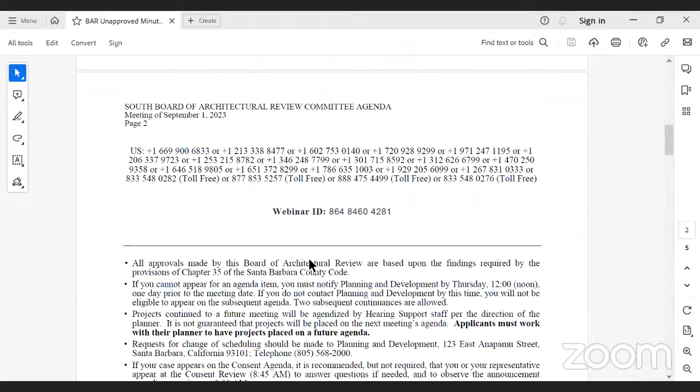Right, so item number 2 is the agenda status report. And number 5, 23 BAR 27, we have a single family dwelling to be continued to a future hearing. Okay, that's the only change. So item number 3, the minutes from the last meeting of August 11th.

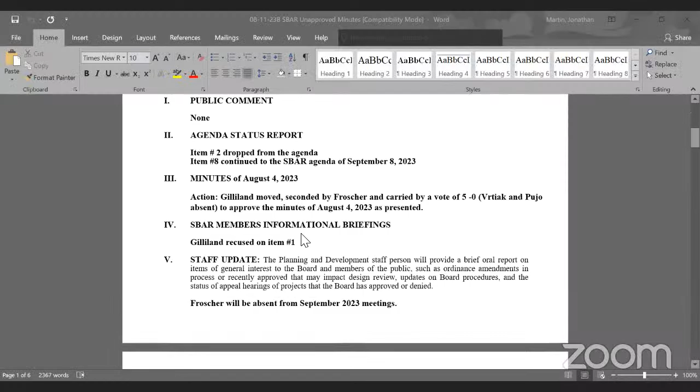Item number 1, I would just add the board has concerns at the beginning. It's just concerns.

Same, yes, yeah. That's a - absence. I think these might be the previous minutes. 8/11, right? Well, from the meeting before that. Just provide renderings or a 3D model. They did, yeah. Well, then maybe we just carry that.

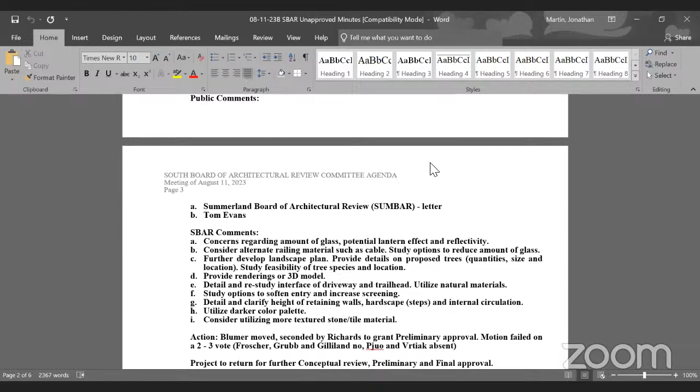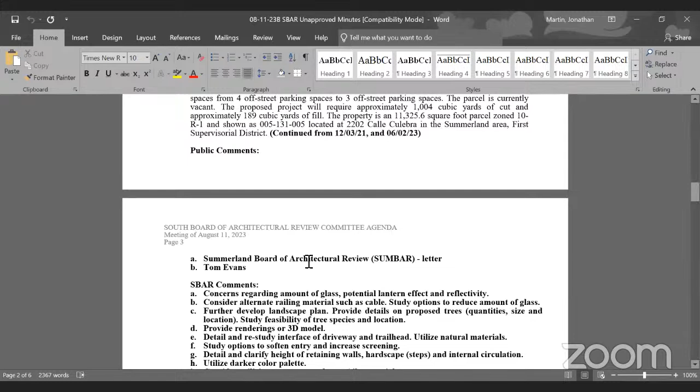Item E, detail and re-study interface of driveway and trailhead, that was discussed last time. But everything else seems to be from before.

I see Josh, you made a motion. This is the approved minutes from 6/2.

Okay, so maybe it is different. Let's go back to August 11th. There was a motion, but the motion did not pass. Motion failed, and I was there for that one. Yeah, that was the latest. So basically we said come back with a few changes, and if you have it, then you're in concept, prelim, and final.

So we did discuss the front glass, the lantern effect, and people are still questioning the railing. That was glass. So I guess this talked probably about darker color palette, talked about the tile. Okay, so I guess that's accurate. Okay, fine then, we can, if there's any, unless you want to make

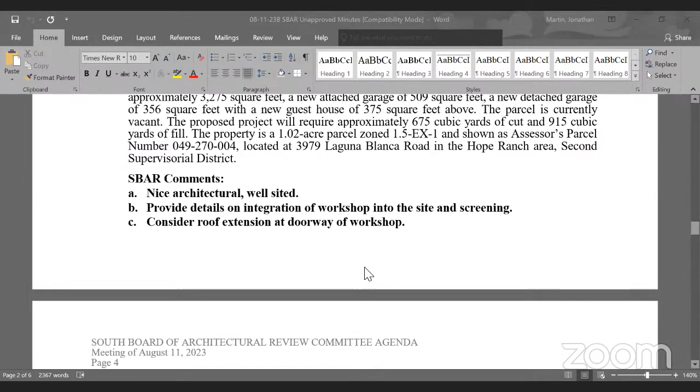Toward project, nice project. Number 3, nice architectural, well sited. Just, yeah, I think like nice architectural style. It's kind of awkward. That's easy.

It's your protection. It was not clear, but if I were to read that, I think what it was was the entry walkway to the front door got pretty close to the large oak. And so we should add to E, ensure protection of large oak at entry. Consider, do you want to comment? No, I think they had it on version 4. Okay, all right, but so we want to add to E and say ensure protection of large oak at entry.

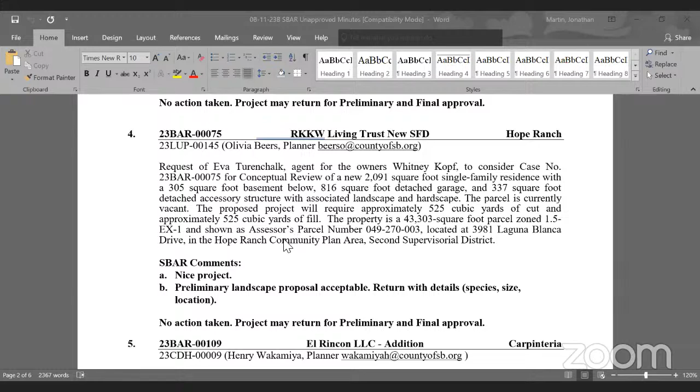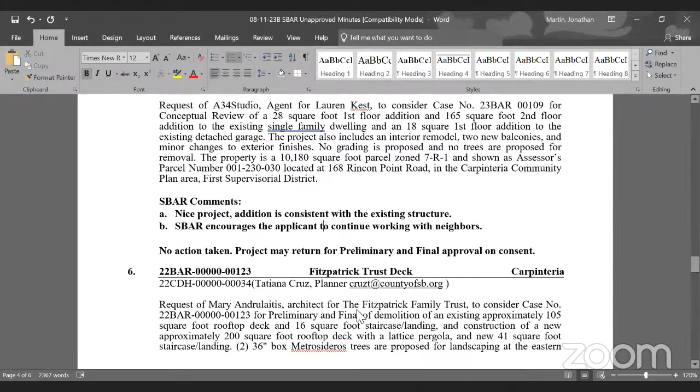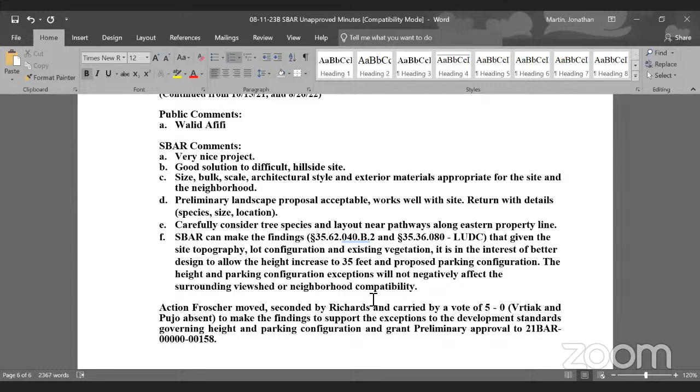There's just a T missing in the middle of that. Okay. Six. Okay. Okay. Good.

Okay, someone make a motion to amend minutes. Make a motion. Second. All those in favor? I recused because I was asked. John also. Yes, it's okay. It's okay because right here. Yeah, it's fine. Okay, so motion carries.

Moving on to item number 4, the SBAR members informational briefings. I'm going to leave that alone next. Okay.

It says Froscher will be absent from September 2023. So, yeah, so I said to Robert, okay, so we need that. So you're gone all of September. Also, yeah, I'm leaving next, so we have SBAR next Friday, right? Yes, yes, I'll be there for that. Oh, okay, and then right, I'm gonna be out up through October 3rd. Leaving that Saturday. Okay, so it's, that's okay. As long as, yeah, so,

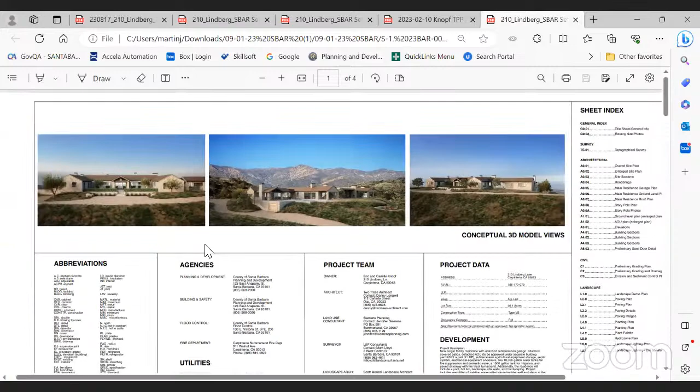The study double hung windows—we can go to, I think the elevation sheet is page... Cameron, can you go to page 17 in the PDF.

So we definitely, I think we were a little early in the development of some of that on the previous set. Oh, it looks like you guys have the previous plan set.

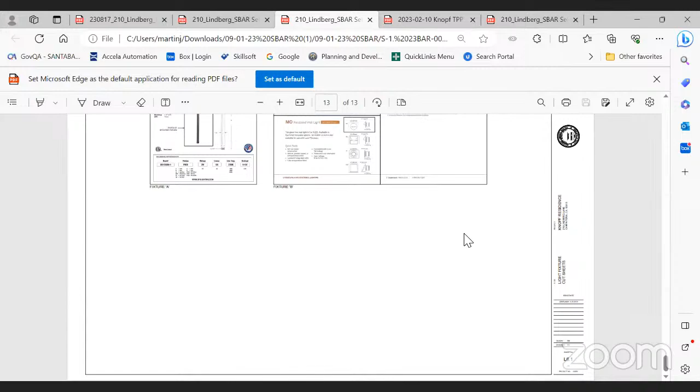Okay, sure. This is Scott Menzel, the landscape architect. The plans that we're looking at, the landscape plans, are I'm fairly certain the most recent. What's happening there, Cameron, with our plans? Yeah, I'm not sure.

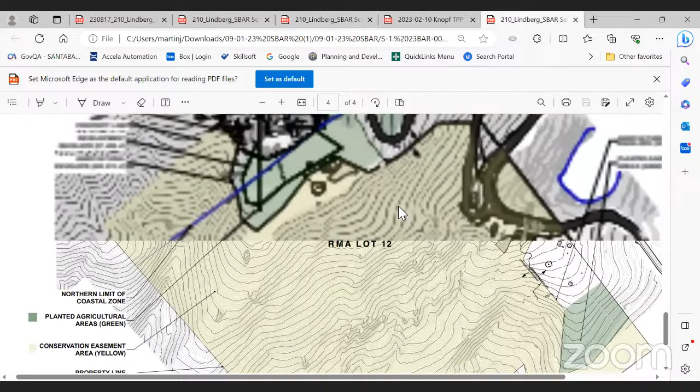Can you go back to the architectural drawings? Oh, there we go. Yeah, that looks correct. I think it's just—oh, the landscape was separated out of the set.

When I upload them for SBAR, I split the plan set into smaller file size sets, so the page numbers are off. I was saying page 17, that would have been if it was one long PDF. So it's just A3.01 to get to the elevations. A3.01. This one again.

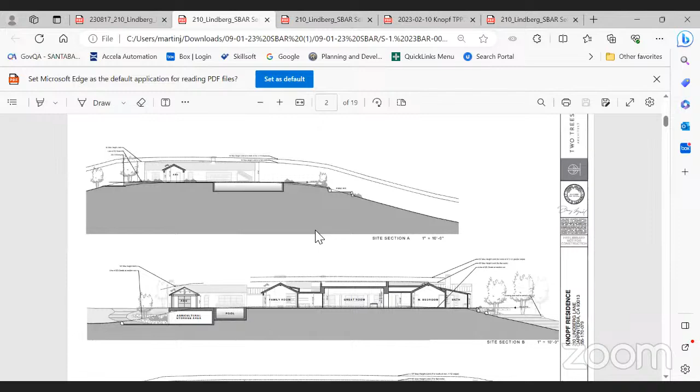So I think it's a different PDF then, is that? Yeah, they were put into three PDFs, and it does say A301. Keep scrolling, just keep going. Yeah, because in the bottom on the title block, it says printed 8/17/23. Okay, good, yeah, that's good. We're good then, there we go.

Yeah, so the north elevation was the comment specific to that. There were these narrower windows on the front and just kind of an overall lack of development at the time of the alignments of the windows. So I think as a whole, at this preliminary level, we've studied that much closer - the alignments, plate heights, proportions, operations. I think you can see that in the elevations there.

On the south elevation, consider dropping header down to match windows beyond. We did that, I think it looks much better on those patio covers, yeah, just following the basic south elevation.

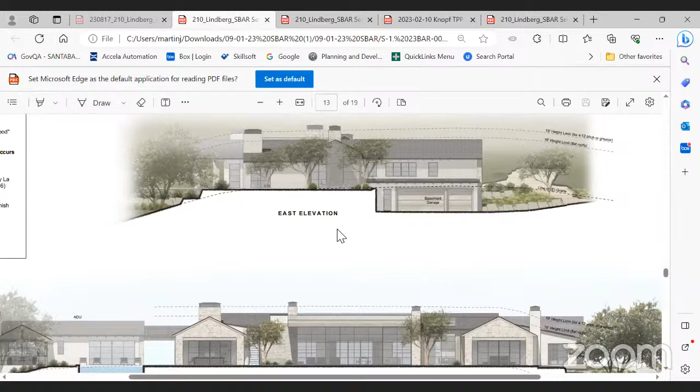Could you repeat that one about the header? Yeah, so previously there was this opening, see the wood header on those covered patios, it was higher and didn't align with the windows, so we pulled those down to align, and I think it looks much better. Has the right amount of stone on the shoulders there, which looks better. Also provides better protection from sun.

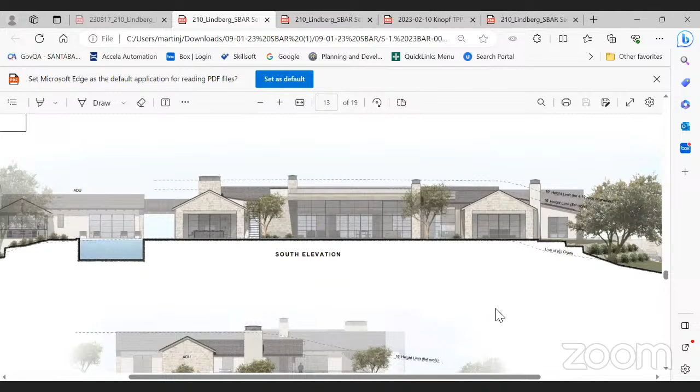Okay, so study materiality of garage elevation. I believe that's - you scroll down, it's on the same sheet. It's actually that's the storage, it's on this sheet. Scroll, I think it's up. Yeah, just scroll up a little bit. There it is. Yeah, so I think we had more stone down there. We just spent some more time looking at the composition of that garage elevation there, which is cut in, and it's not very visible, but I think we made it look a lot better.

The color should be earth tone, not a white. The elevations in 3D have been updated to show the earth tone plaster. The plaster color has an LRV of 60. It's kind of a beige, off-white, and you can see that also on the materials board PDF that should be included.

I'm sorry, did you want to go to the materials board? Yeah, thank you, and I think that's it there. So these are kind of the colors. We want to have some contrast, but also really the goal is to sort of blend in with the natural colors of the stone hillsides in the background, the color of the soil, and just kind of be on the same tone as the natural landscape around it.

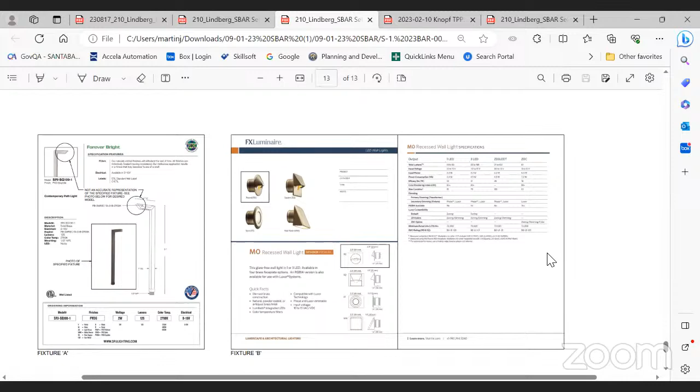If you care to see, there is a lighting plan in this set, with two types of fixtures. If you jump to page 10 of this PDF, I have a path light and step lights. Really all we're doing is illuminating paths of travel from parking areas to the front door. The path lights are 2 watts, step lights are 4 watts.

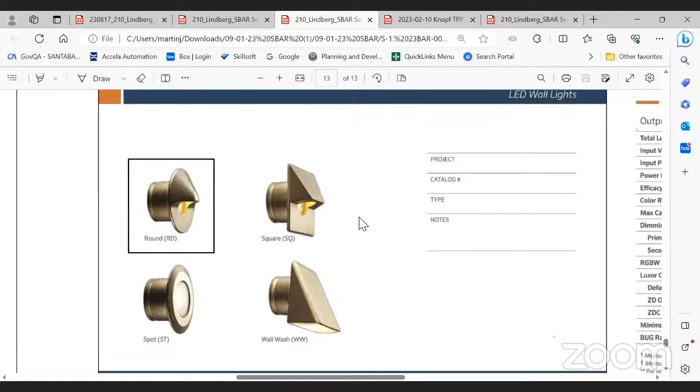Everything's pretty subtle, and that concludes the landscaping. I'm happy to answer any questions. Right, thank you. Anything else from your team?

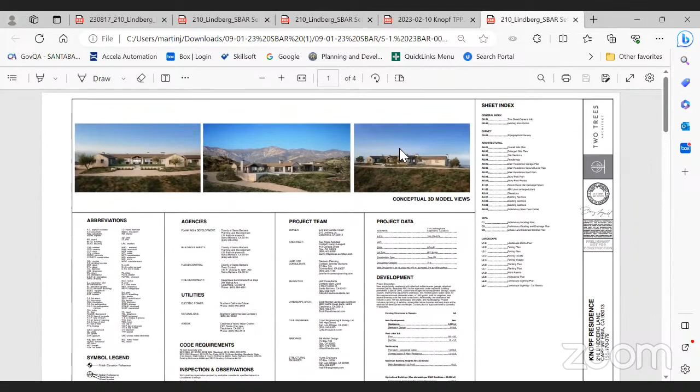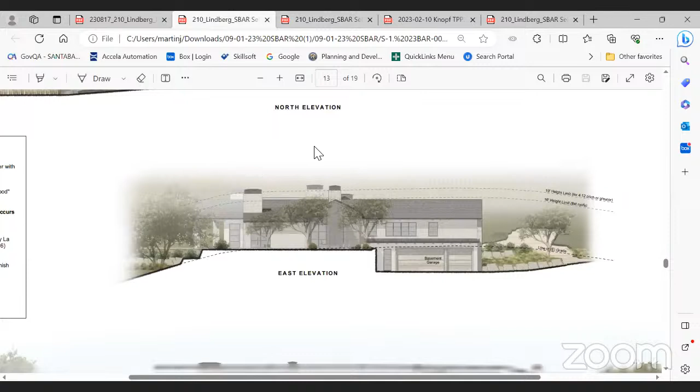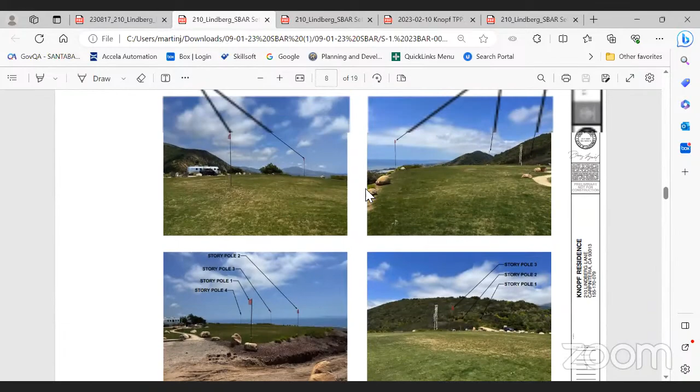Yeah, I was hoping just to have a chance to look at the renderings on the architectural set. I think they're on page... sorry, I don't know which sheet they're on. I'm not sure what PDF they're on there, but they were page 7, so probably the second chunk of sheets. Yeah, probably one PDF over is my guess. A 0.4, it's 0.4. Towards the beginning of the set. Maybe the first - yeah, just keep going, I think you're almost there. Keep going. There you go, yep.

I just think, the members that came and saw the story poles - these gables you see, these 4 gables on the top image starting at the left, right next to it on the covered pool patio, the game room patio, and then the master. Those are the story pole peaks, and those were the fronts of the patio ridges there.

I just want to point out that I think the master bedroom is probably the most towards the edge of the bluff of all the structures. Everything else is very well tucked back. A larger glass, tall ceiling and more glass wall is that big flat roof opening, and that's tucked well back from the edge of the bluff. And by lowering that opening on those covered patios, the glass portion, we've lowered those doors to 8 feet, and they're pushed quite a bit back and well covered.

And I think that, along with the strategic oak tree planting along the southeast corner of that master, does a great job of nestling that in a natural looking way. So I just wanted to point that out.

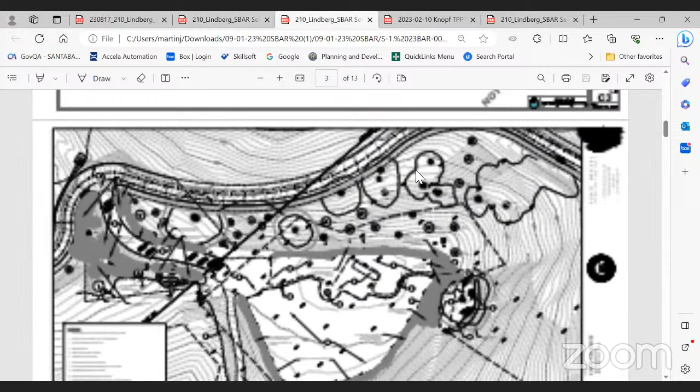That brings me to one of my comments - I think there was an allée proposed for some of the driveways to do the landscape. Scott, have you show us where, if - yes, if you go to page 7 of the PDF of the landscape set, which I think you're on already. It's not this set, next one. Not that one, I don't think that's civil, right? Yeah, but I think they have my plans right after civil. There you go.

There's an allée of olives proposed on this portion of the driveway. From the south, the driveway sits low, so this alley really won't be visible from anywhere, aside from up and behind where new homes are.

Potentially visible from the north, yeah. Everything else is really naturalistic in the landscape, but personally, I'm not sure. Maybe a quick straw vote - obviously the architects weigh in too. Does anyone have any issue with the allée on the site like this?

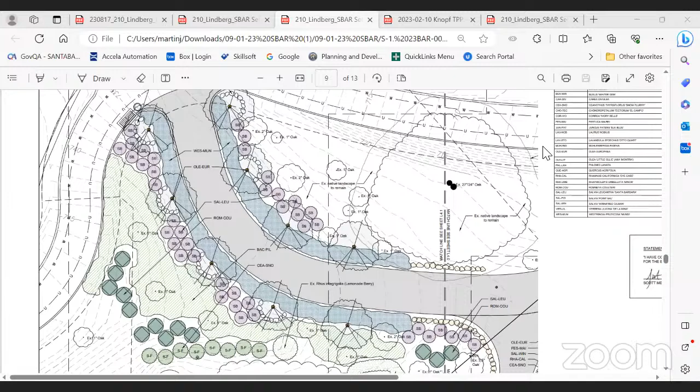The other thing I'll point out is there are a lot of young oaks to the north and south of the alley that we intend to keep, so it's not very long - about 9 plants, 9 trees. My vote would be against it, but if nobody else agrees...

Why is that the problem? Just because from a distance you see that sort of formal planting, and everything else is sort of naturalistic - it stands out, it's got formality. To me, it's at a hook curve, so there's a straight shot in. I think it would be kind of an interruption to the flow of the site.

But I think it follows the topography, and driving up there, there's several references to this - it seems to be kind of a theme, with entries along a good portion of the way up. How big do those trees get?

Maybe 20-25 feet. Not sure if they're fruitless or not. My thought, personally visualizing it, is that the curving nature of it is kind of nice - it will help from a distance break up the monotony that would otherwise be there from a straight shot in, though it's pretty short.

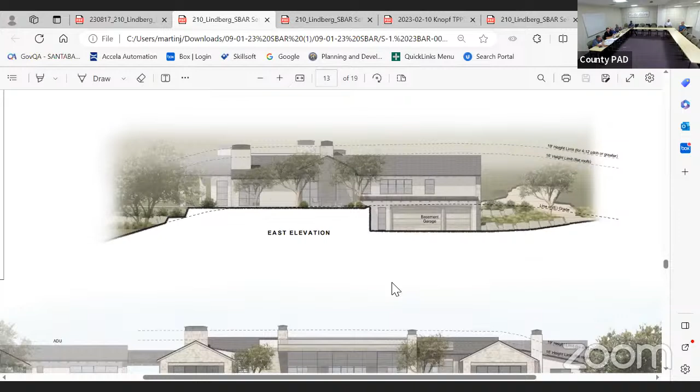The only other thing I wanted to make sure of is that the water tank in the northeast corner, which we didn't talk about, gets screened if necessary. I know there were some oak trees in that area, but I want you to take a closer look and see if it'll be necessary to add additional oaks or other plants to screen it from the north and the east, because those are going to be significant water tanks.

Otherwise, I agree with everyone else here that it's an excellent project, phenomenal site, and you're well on your way. So that would return to the full board.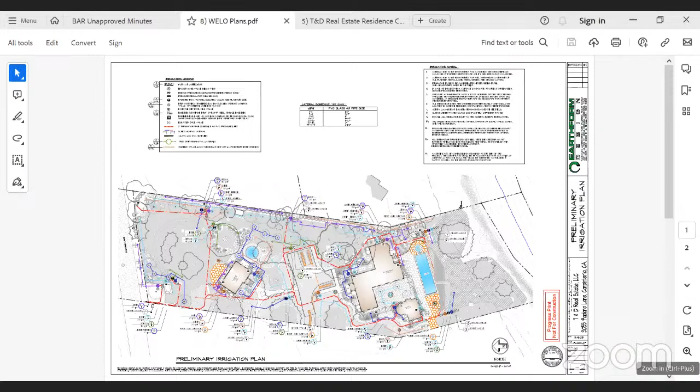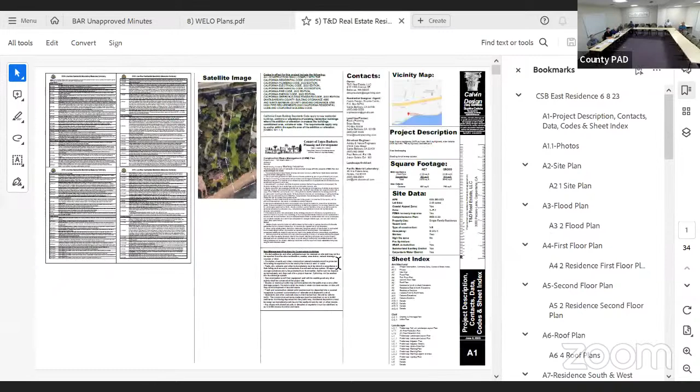So I thought what we would do, if we could, is just reorient the board since it's been so long, and address one of the comments, which was to show development on the adjacent properties. If we can go to page 18. Are these split up? They might be split up. I think so. There you go. Yeah, if we can go to page 18 of the PDF, I think that'll answer that comment.

And you can see the relationship to the project that your board's reviewed several times immediately to the west. As I think you recall, this is a one owner, two legal lot project. So if we keep going down to the civil plan on page 18 of the PDF, that's C 2.1. Keep going, John. Oh, right, one back.

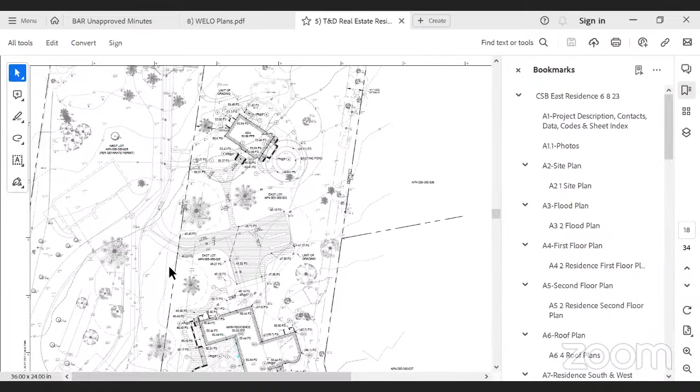There you go. So here, if you look at page left, you may remember that large addition remodel project, and then there was the detached garage to the north along that looped driveway. So upper left, that's the detached garage where we had the ADU above. Kind of where the cursor is down below, that's the existing attached garage where we demoed the guest house above and connected that second story to the residence.

So one of your previous comments was to show the relationship between the two properties and the adjacent. You can kind of see the footprint there from the survey on page right of the neighboring residence. And so a couple of the comments were related to that, the connection to the property. So we're showing that here.

And as a reminder, the previous project that you reviewed, we had the ADU kind of competing with the house. It was in front of the house, so there was some confusion, and rightly so, in terms of how do you enter, do you go through the ADU, how does this all work? So we've actually relocated the ADU to the north, and you'll see that when we get to the site plan. What you're seeing there is the connection to the driveway, the existing driveway to the west. We're going to share that existing driveway, and then we're going to pull into our motor court, which also serves as our required hammerhead, and the fire department's blessed our access plan.

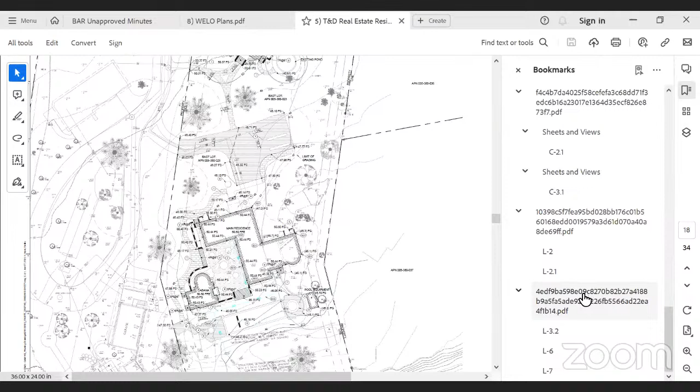So we'll let Sam take over to walk you through. Again, most of what we've done these past years is work with the arborist and our consultant on the sea level rise bluff retreat stuff, so that'll update you on where we are with the site plan. And then we'll go back to architecture, because your comments were mostly concerned about the arrangement, the forms, and the details. Essentially we've copied what we received final approval on for the project to the west, so these are kind of like twin houses. With that, we'll go ahead and hand it over to Sam, and he'll take you through the trees and the arborist report and the site planning sequences.

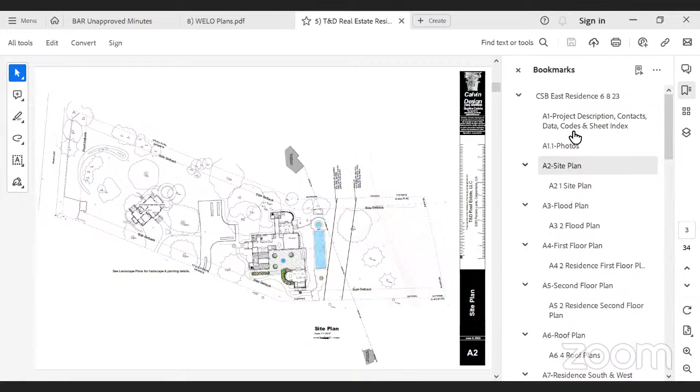Yeah, thank you, Brian. If you could go back to the beginning and maybe PDF 2, it shows some of the photographs of this property. And the reason that we took a step way back and really started to study the relationships to these existing cypress and magnificent oaks is the site is really a park, and you get that impression when you're looking at the top right, looking at the existing house to the west. There's a large expanse of lawn connecting this center part of the property.

I guess the middle left center is really a good picture to maybe blow up to give you the essence of this park-like setting. And what we did is we took a hard look at the critical root zones and all the aspects of preservation of these large trees, because that's the magic of what this owner bought. And we got Duke McPherson, and he's been working with us on the west lot. This lot is a continuity of making sure these trees are really preserved and respected in all the correct ways.

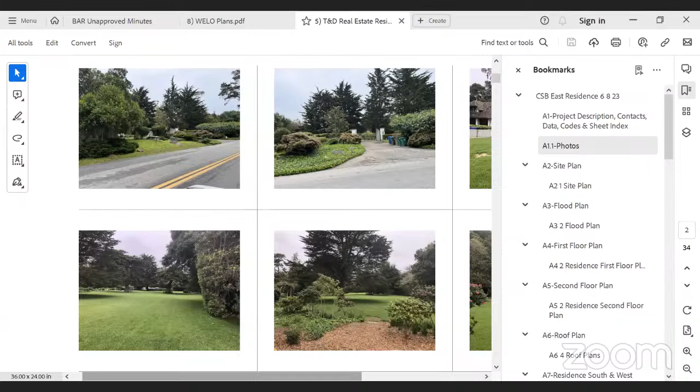So if you go from that picture to PDF 21, you're seeing all the types of trees and brush. The bottom right is looking east towards the neighbor, though you really can't see the neighbor. That bottom right shot also shows the silhouettes of the cypress trees towards the waterfront and ocean view, which is what the main house focuses on.

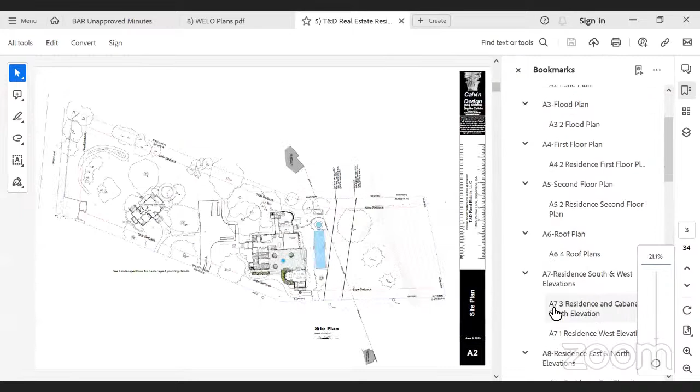From there we took it to Duke and all the CRZs. Show PDF 21L if we could. Sam, one of the other comments you reminded me of was to take photos from the beach and the adjacent properties. The reality is you can't, with that thick screening on the east that Sam was showing you. I can't get a picture from the adjacent property. And the bluff is 39 feet, so from the beach, with the setback, you can't see the house. You actually can't see the neighboring house either. Sorry, I just wanted to make sure we handled those comments at the same time.

That's great, thanks Brian. So if you go back a couple sheets, we want to go to LT1, which is the tree preservation plan. Let's go back maybe one more to give us the aspect of the site and its relationship to the west lot, because the west lot is where the driveway comes in, and then we turn left into that motor court. You can just see the constraints and how difficult this property is to develop any kind of structure because of all the large circles and the tree protection fencing.

We're going to be using permeable pavers in that fire turnaround because it just touches the edges. All that orange is showing where we've got areas of encroachment. So what we did was shoehorn in the project in the ocean area. We've got a bluff setback, which is also a constraint - you can see the line that the pool is on to the south is the bluff setback. Maybe another drawing will show that, but the tree preservation really drove all of our good site decisions.

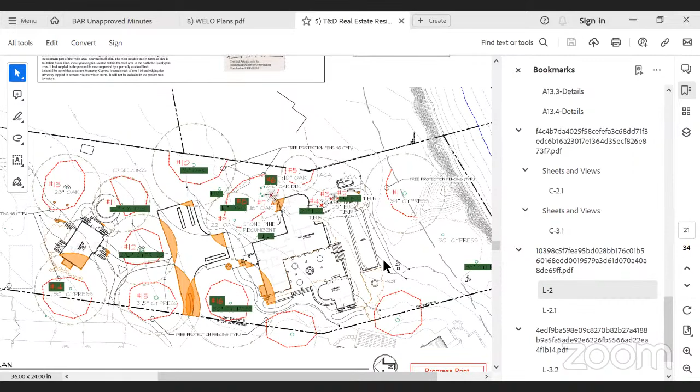So if we go back one sheet from here, that's PDF 21, sheet LO.1 - just one back. There you go.

If you blow up this at all, you can see the landscape plan consists of embellishing the green areas and staying away from a lot of the root zones, trunks and crowns of these big cypress. In order for us to really do the right drought tolerant, water-respecting Montecito Water's one acre foot ruling, we had to reduce a lot of the turf that's on the project. It does have a well, but we designed our irrigation system to work within the one acre foot constraints in case. So you see the green areas are where we're landscaping, and that is around the ADU.

There's an existing beautiful koi pond fountain to the left where the ADU is - that's being preserved. The ADU actually has a nice centered relationship for its outdoor space to the living space, centering on that low 12 to 18 inch high koi pond. All around that is surrounded by cypress trees and large oak trees. So that configuration shows the landscaping in its proximity to the ADU - just subtle small trees, really not competing with the large specimens.

On the main house, you can see we've got an entrance off of the main parking area and hammerhead, with a small fountain there to celebrate an entry focal point. Then we walk into the building that works its way around the trees and opens to the ocean with a beautiful courtyard. That courtyard form embraces the cabana on the west and the main building windows towards the east. Then all of our spaces open to the ocean, dropping down.

I want to kind of wrap up here. I think maybe you guys have gotten the gist. I don't want to take away from any of the architectural side, but we've got a very complete set, knowing that we're going to be going through Coastal Commission. So we've got our hydro zones and our WELO, and we've got some lighting that we can touch on, but it's very simple, and the site plan is very, very subtle, because we're really featuring these large trees.

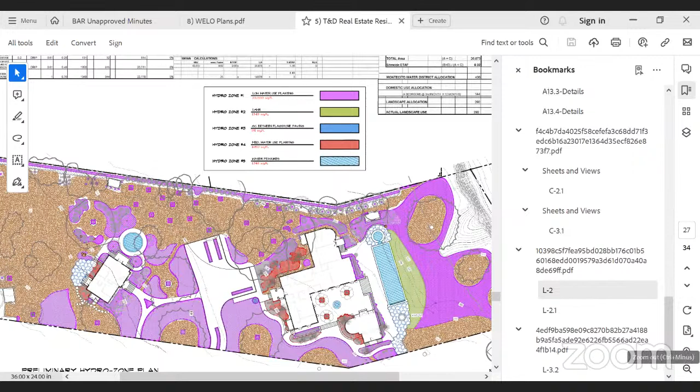Thanks, Sam. I think we can go, Mr. Chair, to Sophie. Since Sam's taking you through the whole site layout, I think we can skip over the site plan and go to sheet 8 of the PDF, which are the elevations. Sophie can walk you through how we addressed those previous comments and tied everything together.

Okay, page 8, great. Sounds good.

Okay, so we're looking at the east lot residential. This is the face looking out at the ocean. We have really complemented the west lot and the east lot. The architectural style is very similar, the Spanish colonial style.

So the two parcels have a great complemented architectural style on both the houses. And the wrought iron is exactly what the west lot has as well. The light fixtures are the same. The chimneys are very complementary, the same style as well.

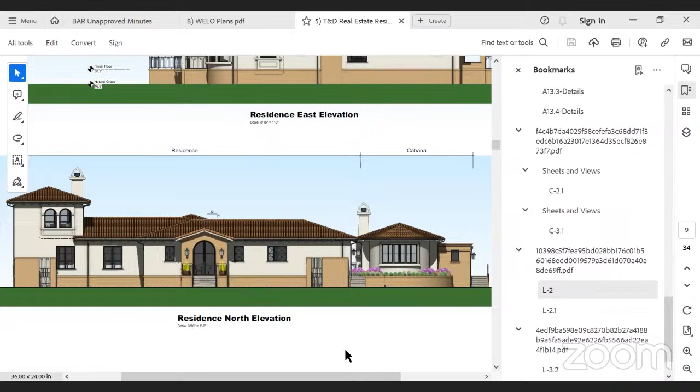Yeah, if you don't mind going to that one. So there's the front entry door, right there above the word residence. And you see there is a 2-story element to this house off to the left side of the page. That's the only 2 windows that have an arched top. Everything else is square top.

And then we have a set of sections. Oh, and just so you know, one of the pages that we do have was run by flood control, and both the ADU and the primary residence had to be elevated by 3 feet. Karen Sullivan had provided us agreement with the heights of the elevations.

So that, I think, gives you the gist. Of course, we've got a lot more details than you would typically see at further conceptual, but we had those from the West residence, so we packaged everything together just to have a complete set. This was our CDP submittal set.

And I should just, in summary, say that we do have a planner assigned. We're going through, she's done her initial review and feedback, nothing that would affect architecture or landscape. It's stuff like issues to do with the sea level study and bio aspects and that sort of thing. So we're not anticipating from a planning perspective that anything is going to change site plan wise, building footprint wise, height wise, as we weave our way through the CDP process.

So I think that concludes the presentation. Of course, we're here for questions. Okay, thanks. Questions from the board?

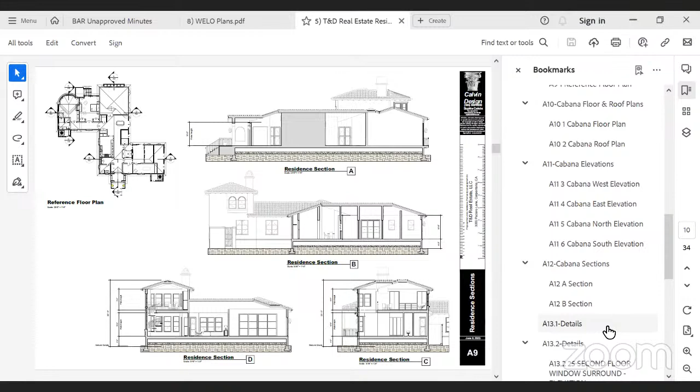I don't think we have 12-inch walls, we have the 6-inch walls. Yeah, I thought the details show that, don't they? We'll take care of that, happily take care of that. Do we have other details? Okay, so it's not... No, I think it's statement.

Maybe. Okay, all right. How about the materials? Do you have a material board or?

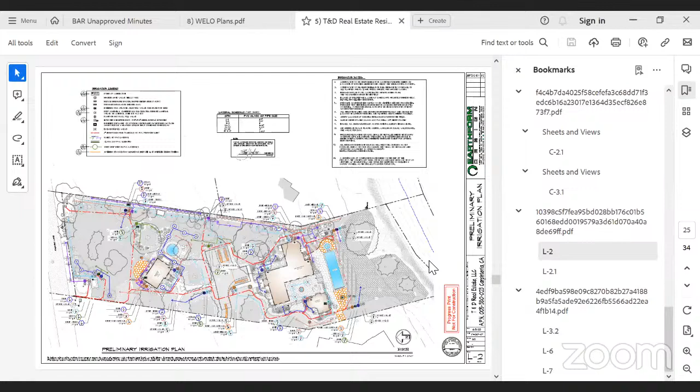We don't have a specific material board, but the colors are on the elevations. We're matching everything on the property to the west, so we'll make sure to provide those - same plaster, trim, stonework, etc. These were the agreed upon final colors and materials used for the project next door to the west.

So just a question - usually you have a two-piece mission tile with boosters and double layer starter courses, and hot iron, real steel iron, not tubular steel. I'm just asking, is that what you're doing or not?

Are you talking about the wrought iron? Yeah, materials - please describe the decorative materials. There are wrought iron railings on the stairs, as well as in front of the cabana, where you see there's a little deck area.

But the roofing will be two-piece tiles, right? Yeah, absolutely, two-piece tile, rail tiles. I think Alex just wants a general description of the materials, like what's the stucco, what's the wood. Well, I can do that with a color board. Yeah, absolutely.

And on the towers, on the round forms, I'm not sure if it's stone or plaster forms to create some interest and projections - you're doing that with plaster, is that correct? Correct. Okay, we'll look forward to seeing the details of that when we come back.

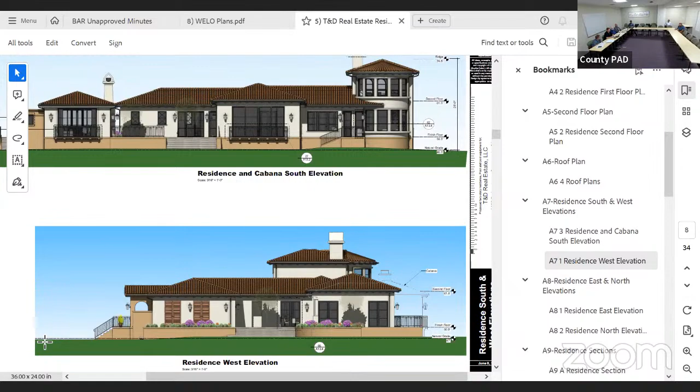Yeah, we have the front elevation, the other one I think it is. Okay, yeah, I think it's a nicely designed building. The entrance is a little bit awkward, but maybe it's just the detail of the way the arch is somewhat a little bit out of scale, but it's something that can be adjusted for preliminary.

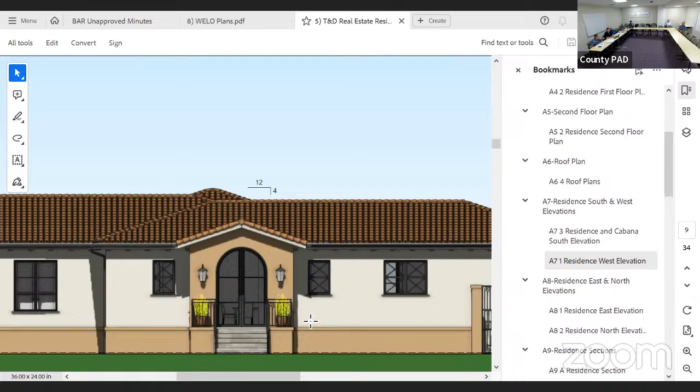In what way? Well simply - yeah, you can zoom out a little bit. The scale is a little bit off, and the glass seems to take over the whole opening. And the shape of the opening is more like it's not the Roman arch - it's kind of not a traditional shape.

Should that roof line plate height of that entry be taller by about 2.5 feet, maybe? That would help - I think it needs to reach up to the top of that roof structure, maybe. The comment is that it should be more prominent and more traditional. Restudy the entry and raise the plate height of the entry structure significantly. I would even consider boosting it above the adjacent roof line.

Just, I don't know what's on the other side, but I'm just studying - I'm saying this not for the record, just commenting on it. Balance out what's happening on the right and left. The center needs to have more prominence.

Okay, so the second comment is to study carefully those projections, those architectural projections from the walls, like the one looking at the north elevation - I think the round tower.

By the way, sorry to interrupt, but it's very deceiving, this elevation, because if you look at the floor plan, you go to the left of the entry, see where that shadow line is - I think it steps back about 20 feet. So that piece in the back is pushed significantly further back. Same with the round tower on the right. The way this elevation is being presented right now, it looks like one contiguous elevation, but the round tower on the right is back probably 40 feet from the front elevation, and the left side that John was talking about is front loaded. I just refer you guys to the floor plan real quick, because it's deceiving.

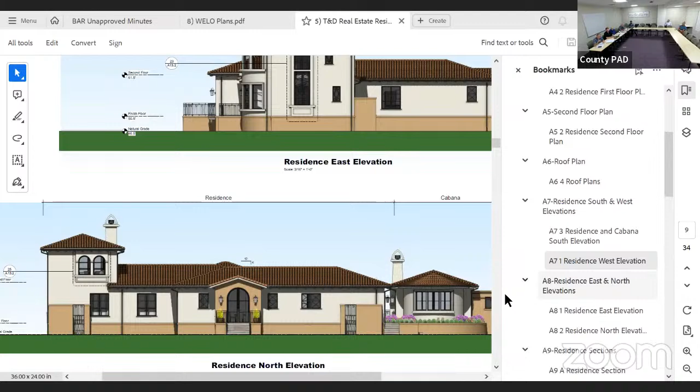If you go up a little bit, it happens again on that side. It's a little bit postmodern in shape, which is what I mentioned—it's a little bit off, but it has possibilities. I think the composition is nice, it's just the detailing of the surrounds that is awkward.

If I might jump in, I think the 3D modeling effort is not keeping up with the detailed intent. It's like somebody on 3D models is trying to achieve something, and it's showing in their elevation a certain way, but looking at the detail, I think careful attention is needed when they come back to discern what the actual treatment of these window surrounds should be. I think it's a 3D modeler struggling to get detailing into the elevation instead of it being properly drawn out—the architectural details are drawn. All right, but I don't know.

I'm looking at page A13.2—detail 23, stair window surround elevation, and detail 24, there's an attempt to describe that. I think that's where we want to dig our teeth into this. Is that what you want to see, or how do we change it? How do we get that way?

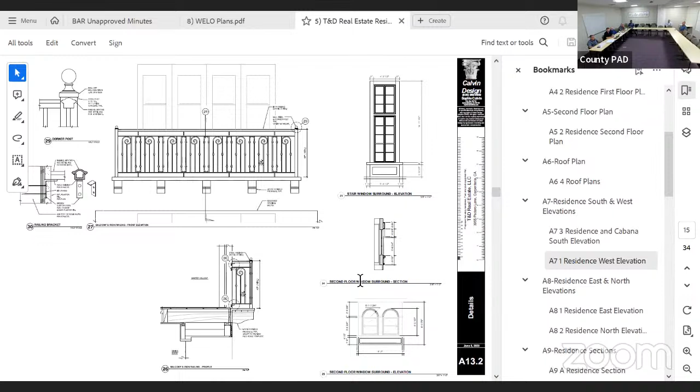You may want to return in progress with those details, the entry, the projections, the windows we were talking about. Are we able to have them return prelim final if they have to go to CDP? You have to go to CDP first, right? We have to go to hearing and have the ZA approve the project before we can come back for preliminary and final.

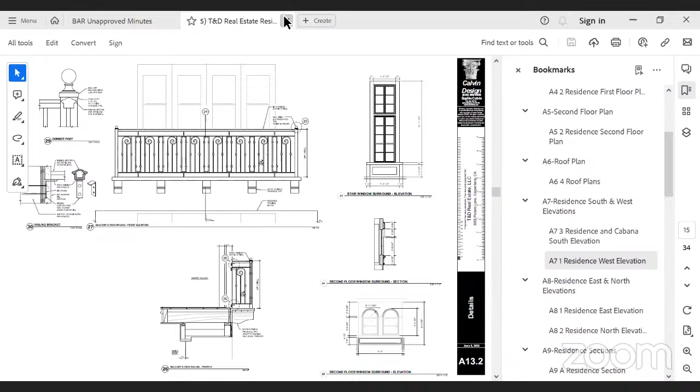Okay, item number 3, the Reagan Family Trust Addition, request of Chris Cottrell, architect for Zed and Peggy Reagan, for preliminary review of a new detached garage, conversion of existing attached garage to habitable, and validating an as-built workshop. This is 710 La Buena Tierra, Santa Barbara, last heard May 19th of this year. And we have the applicant here. Your name for the record, sir.

Chris Cottrell, architect. Okay Chris, we have just a couple comments from last time, I'll read through those: clearly depict and differentiate between existing and proposed development, architecture is appropriate, improvements are reasonable given the size of the lot, landscape plan required to show proper screening, and need to ensure and demonstrate that the sports court lighting will not spill over onto adjacent property.

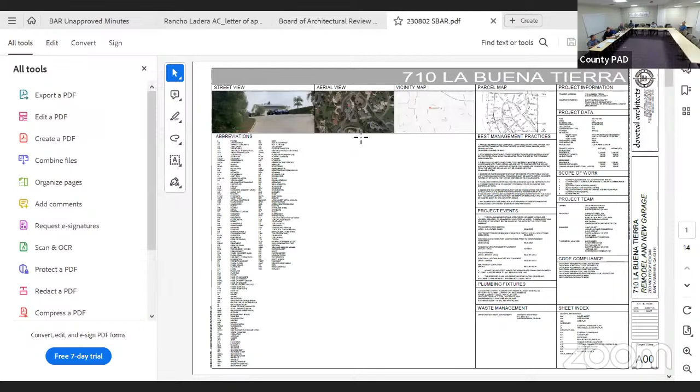So if you want to take us through this and show us what has changed. Sure, I'll go quick. If we jump to page 3, this is the site plan that shows you, if you zoom in down on that lower middle gray building. Okay, you can see the sport court on south and there. Okay awesome, there's a dash line showing the extent of the light illumination there.

It's right in front of the cabana, it's just a basketball lane. There's a basketball backboard in there, so it is not spilling to adjacent properties. So that is one comment. And then page 4 and 5, if you go full screen 4.

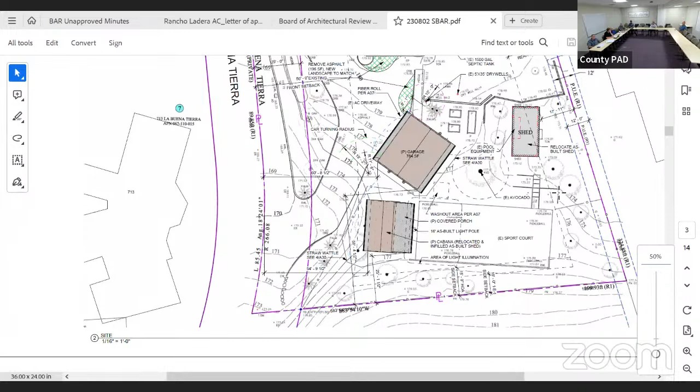Was there a new fixture proposed too, or is that one that was put in? There are 2 little, I think 16-footers, on the sport court that have gone through the process, I don't know if that matters. Okay, this is before, landscape's existing. Sport court's there, you can see the shed is on the north end. We moved that shed to the south side of the sport court.

So if you just flip to the next page now, there you go. This is afterwards. We're removing chunks of the driveway, both on the east and west sides, adding a couple olives on that east side. Actually this is north, sorry. On the north side of the house there's 3 olives where we're infilling the driveway. And then the board wanted to make sure we were screening the cabana from La Buena Tierra, so those are new arbutus. They're on that little slope, should fill in nicely and soften that.

Those are the comments, that's it. Questions? So what was the story with the light?

So how does the light, how do you screen the light? It actually has a shield, so the light is up inside the shield, so it only throws down. Yeah, is that shown in the plans? Yeah. Okay, yeah.

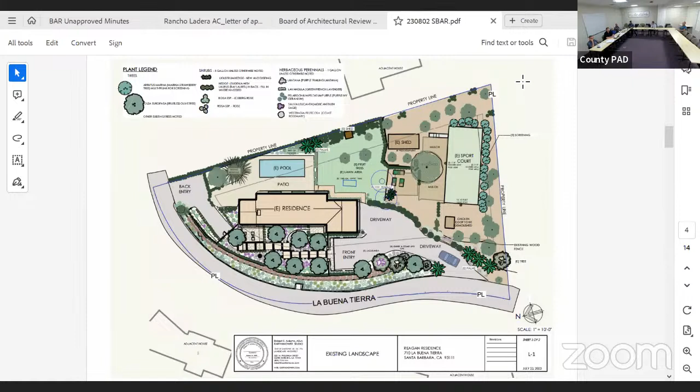Anyway, if somebody doesn't like what you're doing, they want you to change it. And there was some opposition from neighbors. Would the board be okay if we left a little turnaround right there and just shortened that up? It probably doesn't need to be that big, but it would be good enough to create a little bit of a turnaround in there. That almost looks like parking for an RV or something. So let's go to the next page.

Does this scope include a new curb cut? No. And then what's that little brown thing in that corner there, just to the upper left of that car? Is that where the trash cans are? It's not, we're not proposing any trash enclosure.

Anyway, I would recommend you put a bit of a turnout there to make sure you can... zoom into that area, I just don't think that's safe. And on the left side, it sounds like you and the client would like to have some space there. Yeah, they'd be happy to. Keep going, it doesn't say what that is.

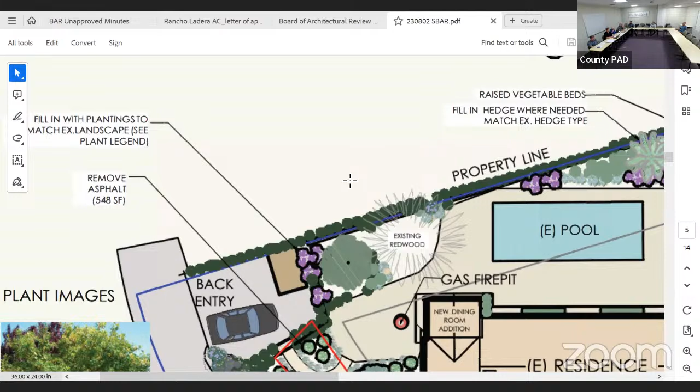Well, the garage I assume matches the detailing of the house. Yes. You can see, we'll go through the elevations. And then these - the shed is moved to become the cabana, that's existing, and that's the garage. Okay, two ends of the house have the board and batten, the garage will have the board and batten as well.

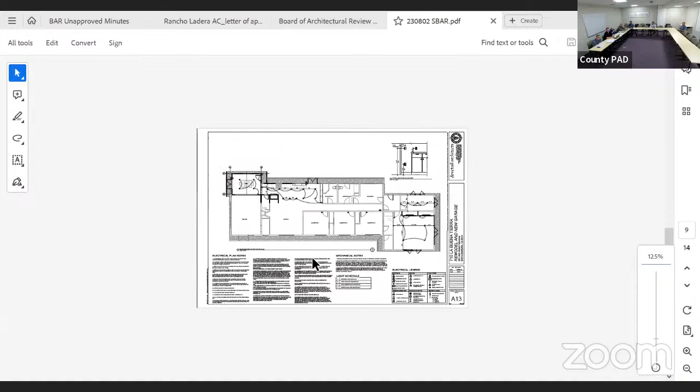Okay, and then, you know, landscape - I don't know if you had planting and all that. Yeah, but that it's needed for final. All right, so comments, anything else? It's good enough with the comments we made. Okay, so concerns about the extra parking space or drop-off area, and safety of that space, so we hear from preliminary if something.

Yeah, I'll make a motion. Comment to study the parking on the north, first comment driveway, and to return for final to full board or consent. Okay, so return consent - was there a second for that? John, yeah, second, second. And all those in favor? Aye. Motion carries, thank you.

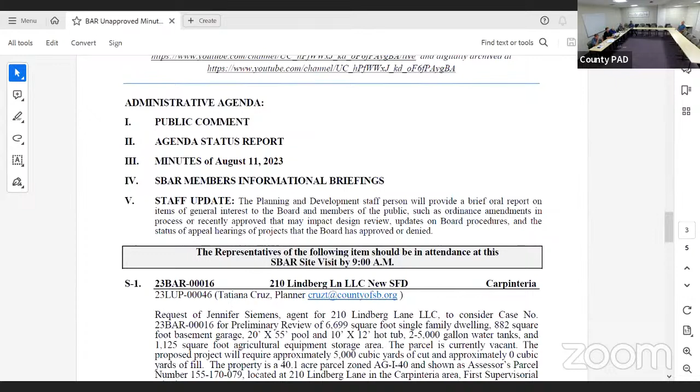Okay, this is the ROIC California LLC pad climbing gym, request of Jay Ritterback. Preliminary and final review for a new second level addition to an existing single-story commercial space at Magnolia Shopping Center, 160 Hollister Avenue, last heard January 20th of this year.

We have our applicant here with us. My name is Yishai Horowitz. Welcome. Jay, are you with us? Yes, I am. I'll turn it over to you, with a 10 minute timer, to walk us through and address the comments and show us what's changed.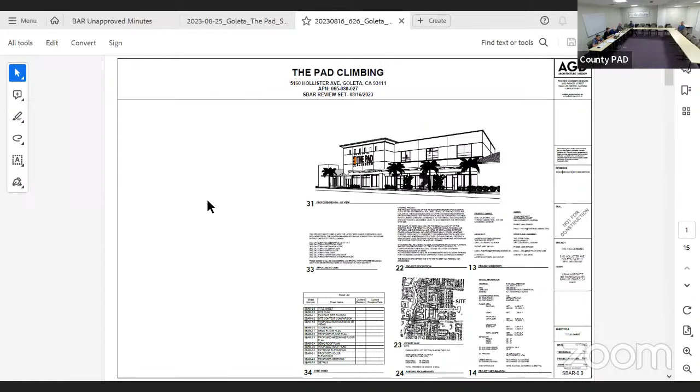Thank you, Chair, members of the board. We didn't have too many comments from SBAR. The last time we were before you was May 5th, and we were given direction focused on two areas: the windows, and the roof line, breaking that up. We provided a response letter to those comments, which staff has provided to you. We've taken those comments to heart, changed the windows, and addressed the roof line. The plans and all elevations reflect those changes consistently.

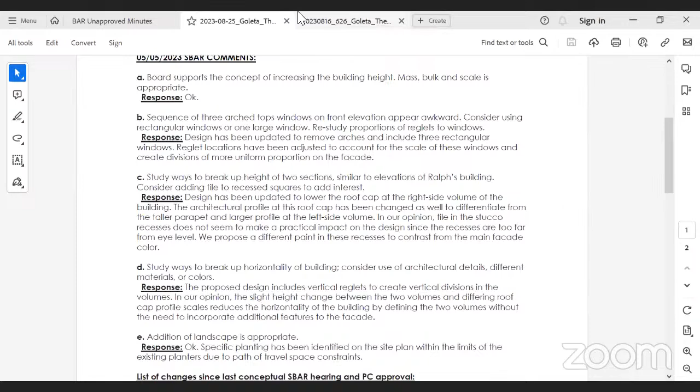We received approval from the Planning Commission on August 2nd, a month ago, with unanimous approval for the increase in height. They agreed with the SBAR that the size, bulk, and scale was appropriate, and that the use was appropriate as well. They liked the direction that the previous iterations and suggested changes guided the project through, which really made the project sail through, and they appreciated those changes.

We have one of the representatives from Andrew Goodwin Designs, the architectural team. Angelique Macklin is also on the call if there are specific architectural questions. I think our elevations and renderings should adequately give you a flavor for the project now. So with that, I'll reserve the rest of my time for brevity. Thank you.

Can you address item C: study ways to break up height of two sections, similar to elevations of Ralph, and consider adding tile to recessed squares to add interest? Are these the best elevations for us to be looking at on screen? I think further along in the document there should be colored elevations that might be more helpful. Maybe back up one... two, then. Elevations, right there. Okay, so this is the best page then, maybe?

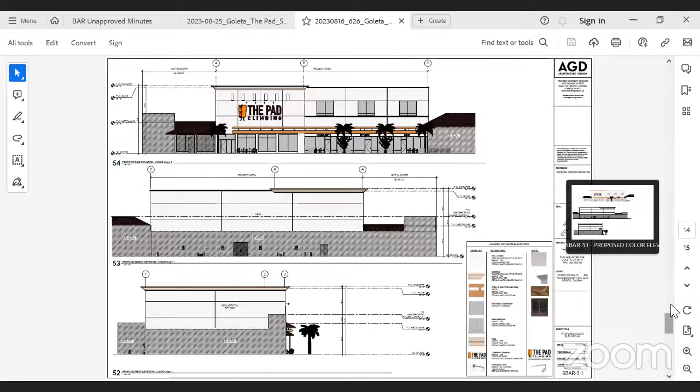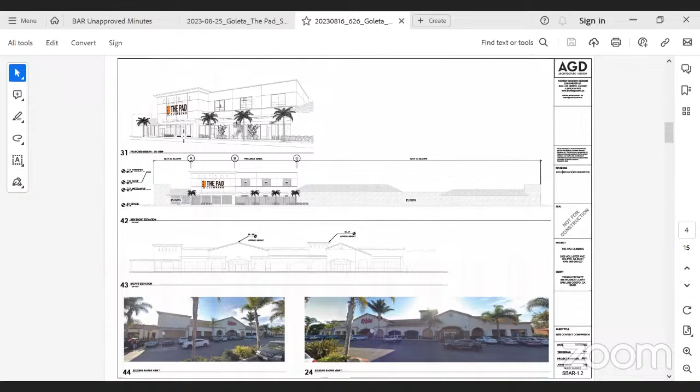I believe the second sheet in the set may represent that more clearly, or maybe another one down — there's an overall elevation you had pulled up previously. There we go. So in view 31 there, you can see how it continues across and how those two volumes are in different planes with the roof line changing.

Is that also shown somewhere in a plan view, so we get an idea? Yes, the floor plan, I believe if you go to the mezzanine floor plan, you can see the arbor. Do you know what sheet number that would be? I believe it's maybe two more sheets down, or one more beyond that. There we go, you can see the arbor. Back one to where you were. Yeah, there we go, I see.

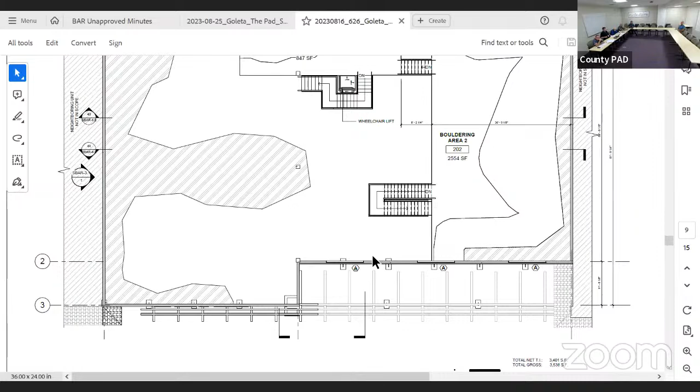Okay, great. Anything else? Yeah. Okay, all right, so let's go to questions from board members.

Anyone have questions? This trellis that you proposed, would it be possible to have planting on that, vines on that? One of the suggestions previously was to try to extend the red tile roof over there to more integrate this space with the existing composition, but the trellis, if that were planted in vines, I think it would be a big help.

I think there is a landscape plan, right? Can you show us what is being proposed? Because one of the comments is addition of landscape is appropriate. So where is the landscape plan here somewhere? Yes, I believe the second or third page should have landscape. There we go, if you go back one page. There is a landscape key up above, and they've been identified in the bottom right floor plan as well.

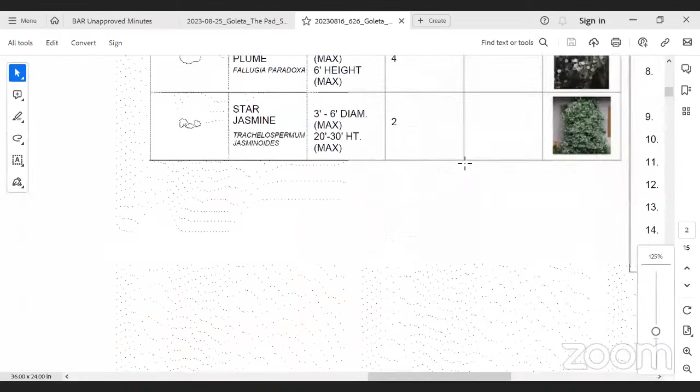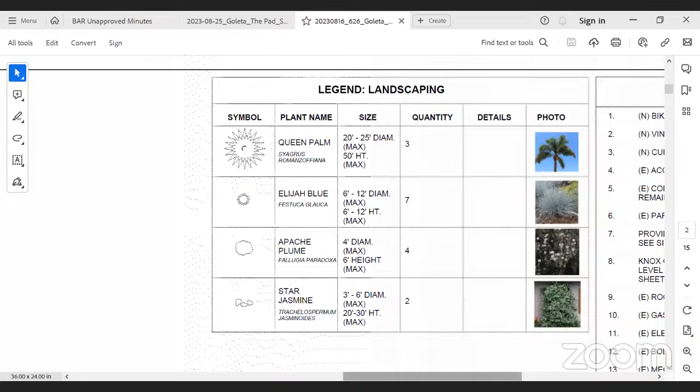So we've proposed a climbing vining jasmine plant to go up that trellis element. There are two columns flanking the entry, and those would be planted with vines that could then continue up over the trellis element. You see this in the plan, so I think it's over there, down, let's see what that is.

Yes, we're adding queen palms. No, it's a little hard to read. Yeah, what's clear is that plan? Yeah, but I think we go back to the list.

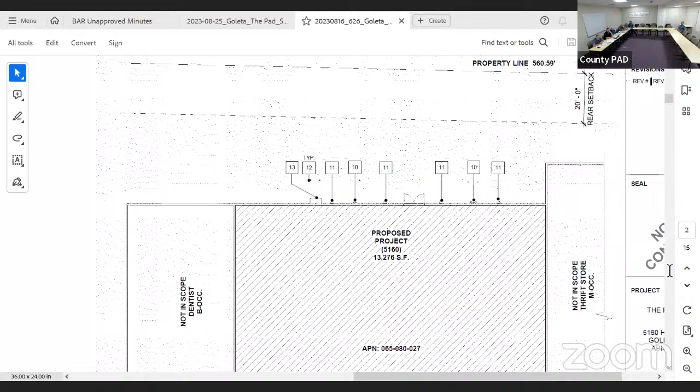I think you might want to restudy a few of these plant choices, like the Elijah Blue Festuca, that's going to be dead in two years. I'm not even sure what the Fallugia is, but just, I guess, maybe restudy those two.

The Star Jasmine's really slow, but if you just wanted to get it up on the trellis, I would use something else, like honeysuckle or something like that. Trumpet vine, maybe, it's very heavy. But yeah, the Star Jasmine's just slow, and it's kind of more for espalier rather than getting a vine up onto a large scale arbor.

So maybe restudy the last one. Wisteria, deciduous and messy, but aggressive. So I would restudy the Fallugia and Star Jasmine and consider, you need low water use plants. So maybe instead of Star Jasmine, I think the giant Burmese honeysuckle might be a good choice there. And then for the grass, just something longer lived and tougher because it's a commercial setting. Otherwise, I think we're basically through with questions.

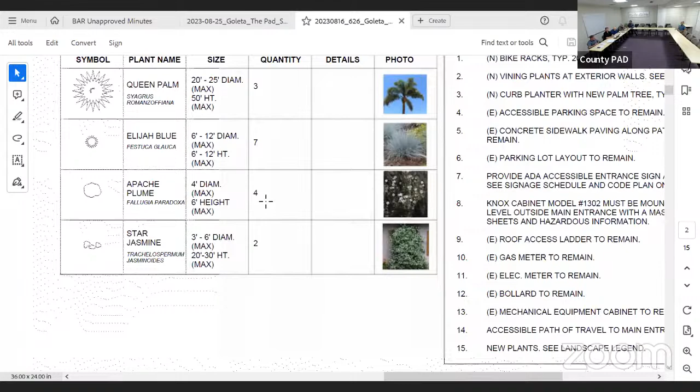Yeah, I think that, are you proposing any color for the building? I think that a darker color, even if much darker tone than the existing, would help reduce the impact of that big facade.

Do you have a materials board with colors and all that, or is it probably matching? We do, it's right there. Yeah, our intent was mostly to match the existing site conditions of the building that our suite is set within, and then also coordinating back to the larger Ralph's building that's directly across from our suite.

I think it would be a good idea to show your color on your elevations, so we can get an idea, I mean, it's big, it's a big facade, and as we're all trying to sort of reduce that visual impact, I think a dark color would be beneficial.

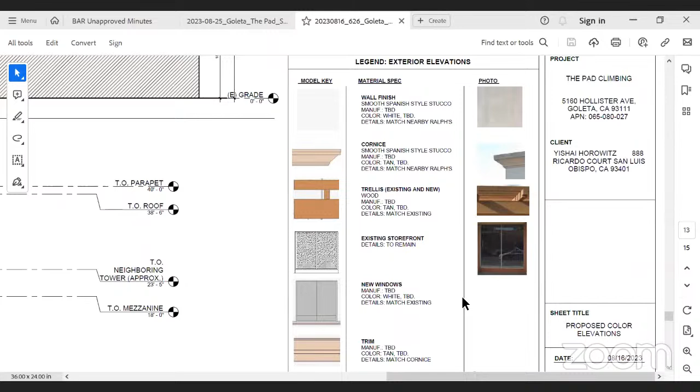Well, we're here for that. There are also examples of basic renderings that we have in the set as well that show the colors of the building in context in connection to its neighboring suites. We can find those, it's later in the set, I think. I think prior, it's SBR 1.3. Thank you, Jay.

Oh, I see. That's kind of a photo. I think if we're darker color, it would reduce the visual impact. Yeah, this doesn't really show the color of the arbor, which I think is darker color too. So it's not representing itself well.

Anyway, we'll get to the comment in a minute. There is no public comment, but we need to address it, so bring it back to comments. John, if you want to give us a concise comment about which portion of the building would be darker, or the whole thing, or what?

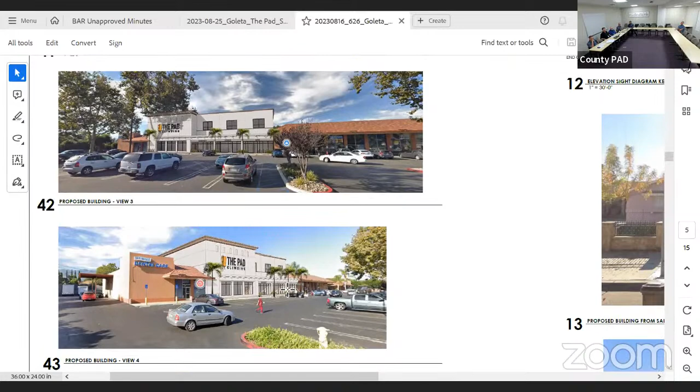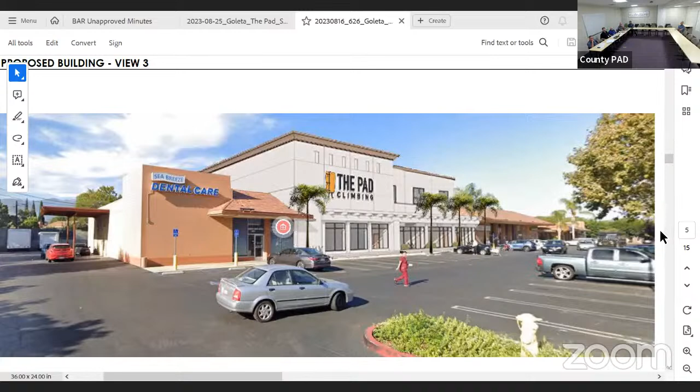Well, I think you could study these elevations, and maybe the whole building may not be the same color all the way across. It would help to break up the size of it and to illustrate some vines on the trellis. I think it would be helpful. Perhaps this facade that has the sign on it, if that were darker, that would break up the mass of it also. But it need not be over the whole building. I think that should be studied.

This is a big visual impact in there, and remember, it's a crappy strip mall. Yeah, it's a lot better than what's there, let's do what we can with it. They've made a lot of improvements to that shopping center. On the other side, the back side hasn't been really touched. This is actually pulling some of that over.

It's significant. So, so there's one comment, and you want? I agree with John. I think breaking up the massing by changing the color, getting the material colors into this rendering will sell this project to the board. If you follow John's advice, looking at how to shift the colors between the massing, I think we're going to find some success here.

It would be better to have a darker color. I think they should study it. I don't know, it could be one or the other. Any effort in that direction is going to help. Also, a darker color perhaps would reduce the impact when it's seen from different perspectives, from the back. Look at what's happening now on the left side of the panel.